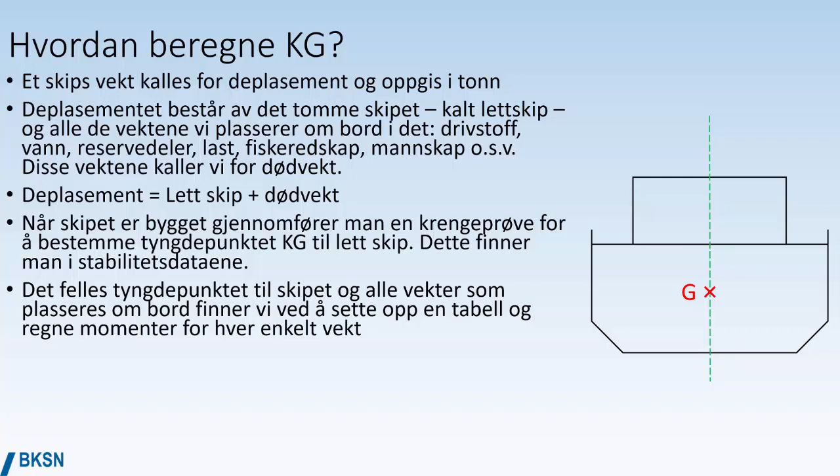The center of gravity of the ship and all the weights placed on board we can find by putting up a table and calculating the moment, or torque, for every single weight. So we put a lot of different weights on board the vessel and can easily calculate the center of gravity for the ship with all these weights.

Moment equals weight multiplied by arm, where the arm is the kg for the specific weight, and we will see how this is done. Then the new kg is sum of moments divided by sum of weights.

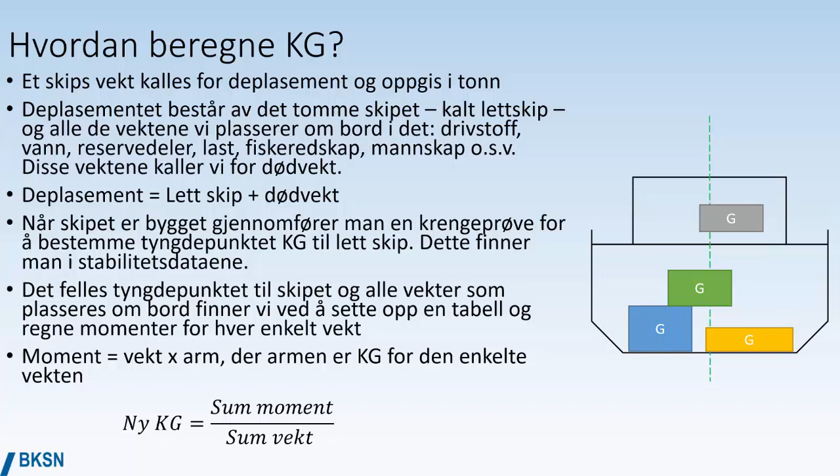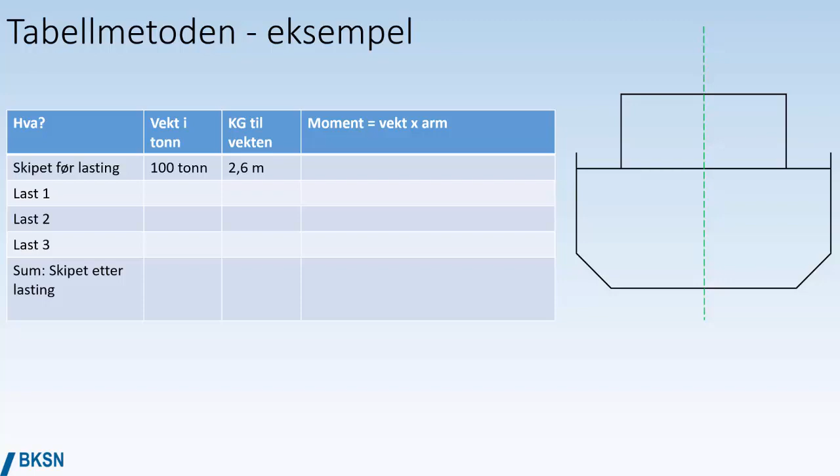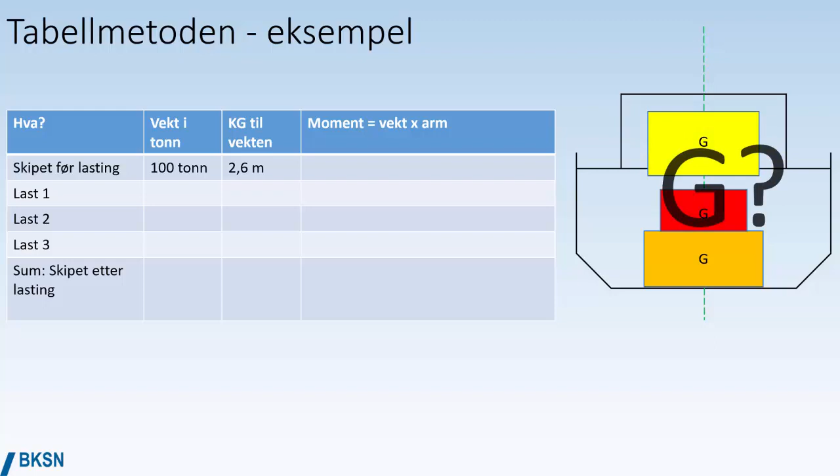An example: the ship before loading had a displacement of 100 tons with a kg of the vessel of 2.6 meters, and then we put on board 3 different weights. What is the G afterwards?

Before loading we had a moment of 260 ton meters. We take on board cargo number 1, 30 tons by 1.2 meters, which gives us 36 ton meters. Cargo number 2, 22 tons at a kg of 2.5 meters, gives us a moment of 55 ton meters. Cargo number 3, 5 tons at a kg of 5 meters, gives us another 25 ton meters.

Then we sum the weights and sum the moments, and the new vertical center of gravity is sum of moments divided by sum of weights. So 376 ton meters divided by 157 tons gives us a kg of 2.39 meters. Before loading the kg was 2.6 meters; after loading it's gone down to 2.39 meters.

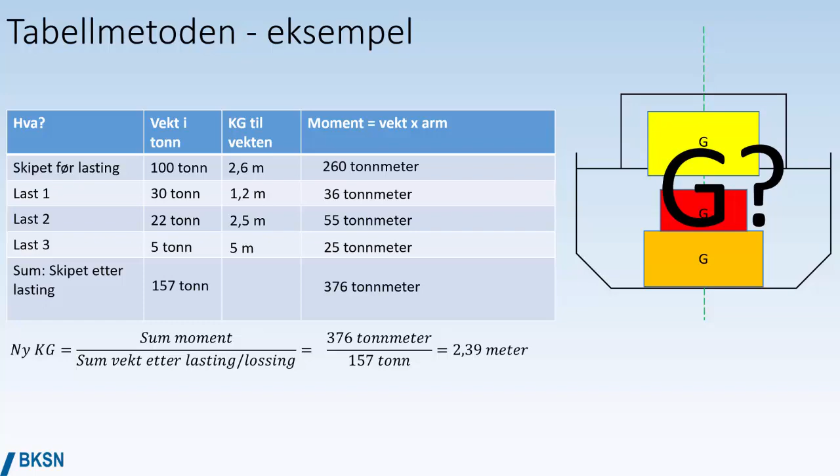A working task: we have a vessel Kystfart with a displacement before loading of 210 tons and a kg of 2.2 meters. Then they take on board a deck cargo of 24 tons with a kg of 3 meters. What is the kg for Kystfart after loading?

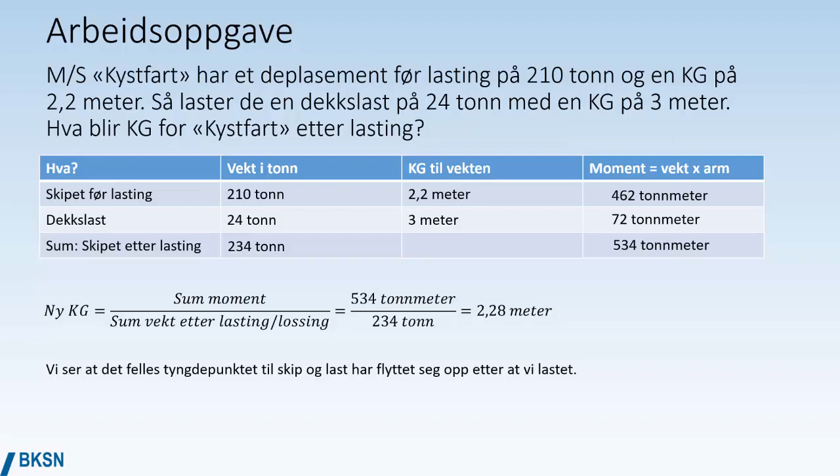210 tons multiplied by 2.2 meters gives us 462 ton meters. The new deck cargo, 24 tons at kg 3 meters, gives us a moment of 72 ton meters. Sum moment, 534 ton meters. Sum weight, 234 tons, which gives us a new kg of 2.28 meters. So we see the center of gravity of ship and cargo has moved upwards when we loaded the deck cargo.

For discharging it's pretty much the same, except that we have to use a minus. A ship has a displacement of 550 tons before discharging and a center of gravity of 3.06 meters.

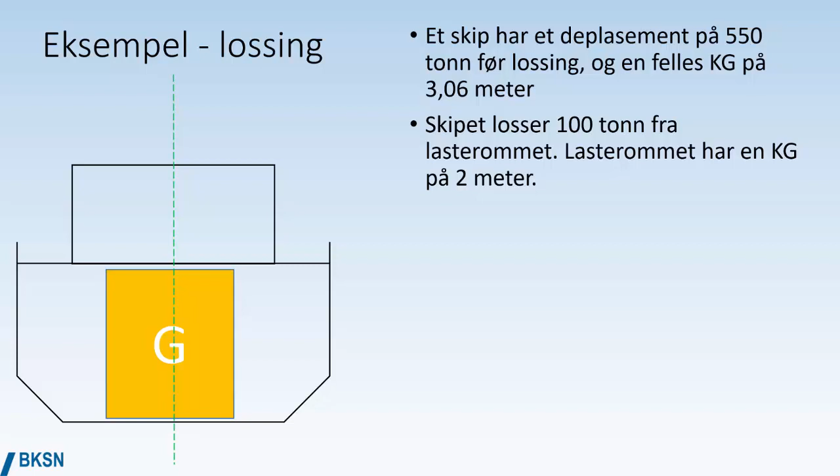Then we discharge 100 tons from the cargo hold. The cargo hold has a kg of 2 meters. So we discharge that, and then what will the kg for the entire vessel be after discharging? When we discharge weights we use a minus for the weight in the table, as we will see.

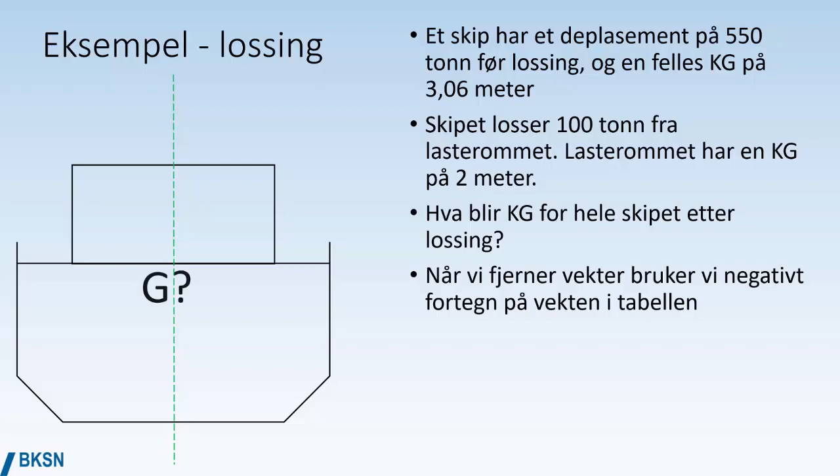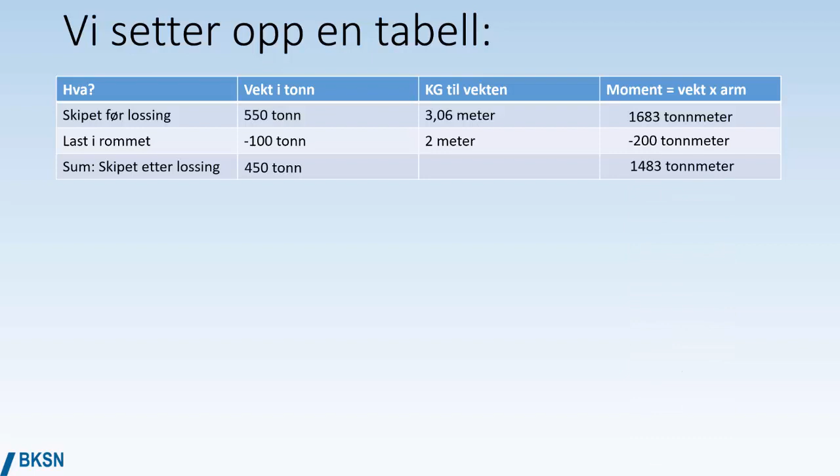Put in the table, we see the discharged weight last i rommet, minus 100 tons. The calculation gives us a moment of minus 200 ton meters. This gives us a displacement after discharging of 450 tons, a moment after discharging of 1,483 ton meters, and the new kg is then 3.3 meters.

So we can see that the center of gravity of ship and cargo has shifted upwards after discharging, which is logical since the discharged weight was fairly low down in the hull.

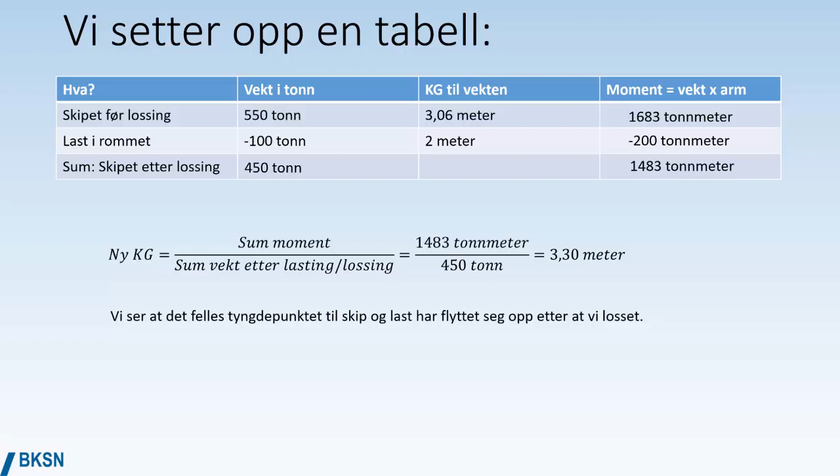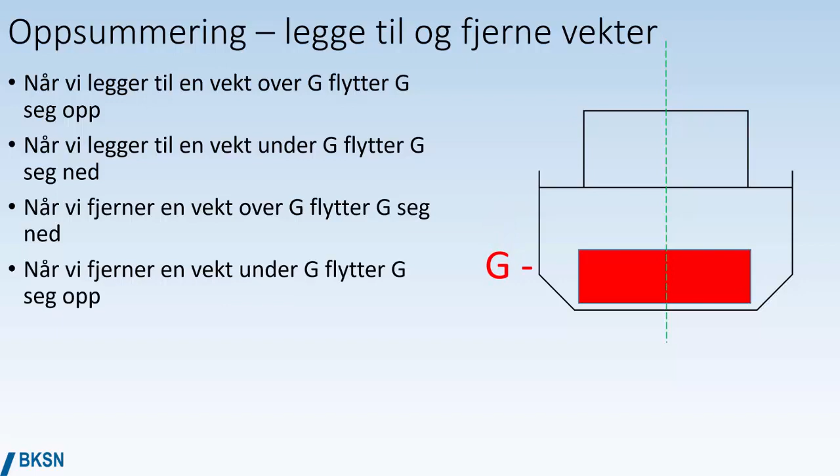Summarizing, adding and removing weights: when we add a weight above G, G shifts upwards. When we add a weight beneath the center of gravity, the center of gravity will shift downwards. When we remove a weight above G, G will shift downwards. And when we remove a weight underneath G, G will shift upwards again. This is, of course, very logical.

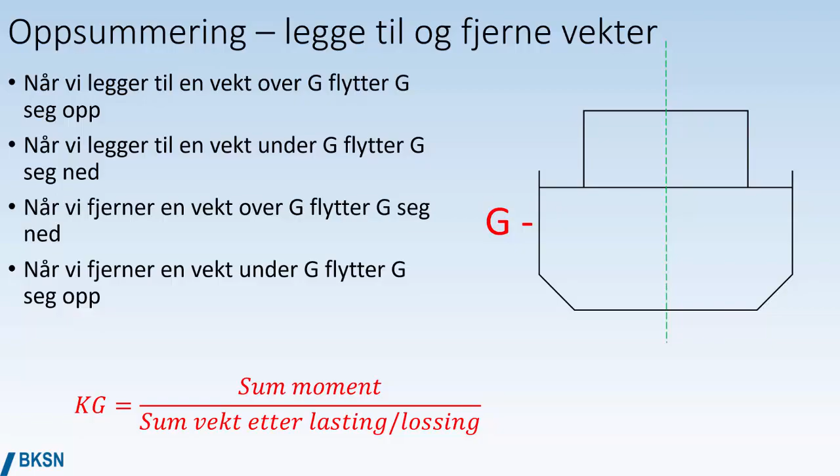Kg, the center of gravity for the vessel, is sum of the moments divided by sum of weights after loading or discharging. So far, we have made a table, added or removed weights, calculated moments, and then summarized to find the kg.

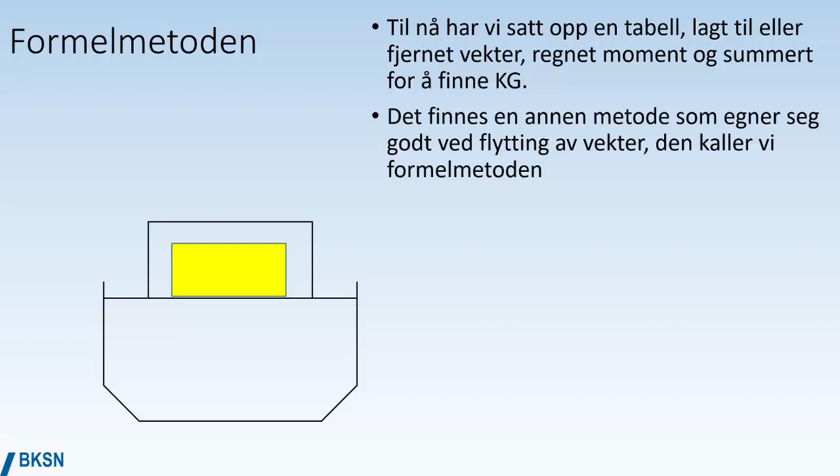There is another method which is suitable when you are moving weights on board a vessel. We call this the formula method. The formula looks like this: GG1 equals weight multiplied by arm divided by displacement. GG1 means how much G of the entire vessel moves as a result of moving one individual weight.

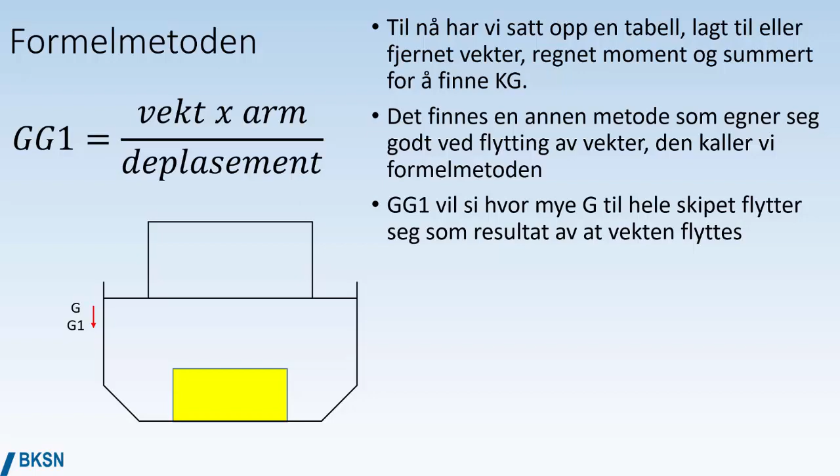So we move the yellow box from the deck level down into the hold, and GG1 is how much the G of the entire vessel shifts. We will look at an example.

We will calculate how big the effect on KG is if you move a 3-ton fishing net from the deck down into the cargo hold. We're assuming that the GM is 0.48 meters, the displacement is 750 tons, and the vertical distance between deck and the cargo hold is 5 meters.

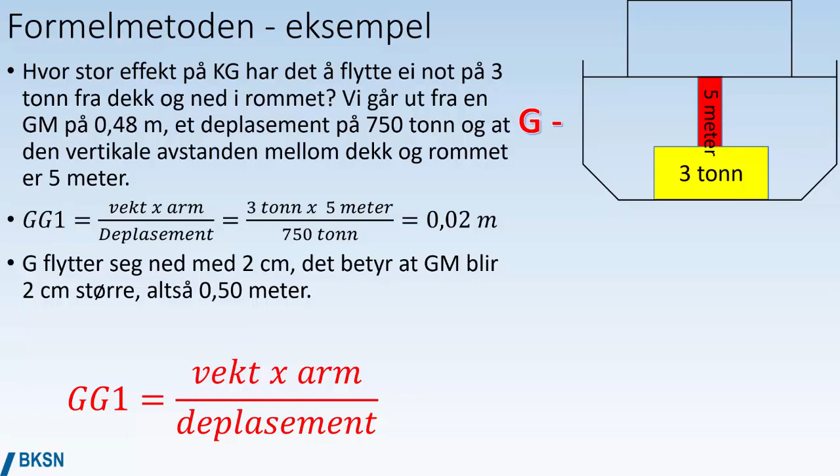So we're shifting 3 tons downwards 5 meters. How much does the G move? We put into the formula 3 tons by 5 meters divided by 750 tons, giving us a GG1 of 0.02 meters. So G moves down by 2 centimeters, which means the GM will be 2 centimeters bigger, going from 0.48 meters to 0.5 meters.

Another example: we have a GM of 0.39 and we want to move an old compressor from a lower deck onto the upper deck to put it ashore. The weight of the compressor and its equipment is about 2 tons and the vertical distance is 4 meters. The displacement of the vessel is 245 tons.

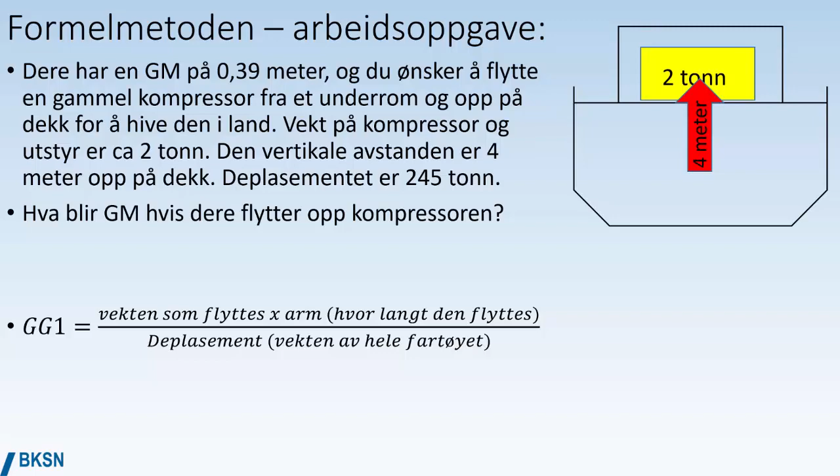What is the GM if we move the compressor up? How much does this move affect the G of the entire vessel? We put the numbers into the formula: 2 tons by 4 meters divided by 245 tons, which gives us 0.032 meters. The GM was 0.39.

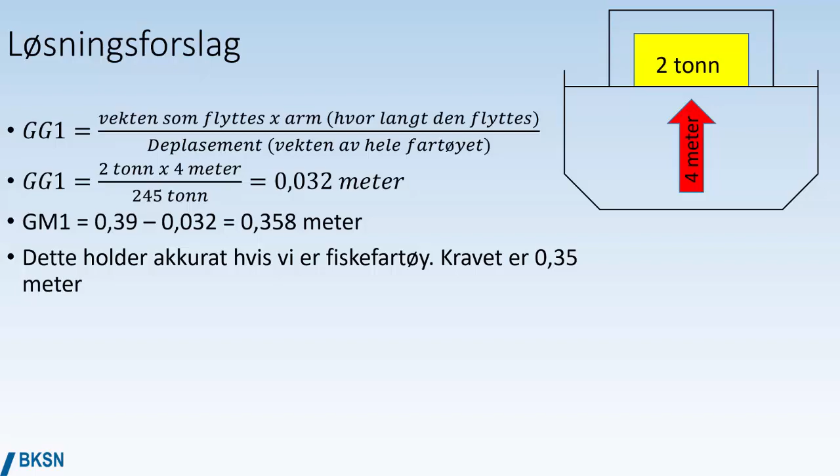We're moving a weight upwards in the vessel, which reduces the GM, so we end up with a GM of 0.358 meters. This is just within the requirements if we're a fishing vessel, where the minimum requirement for the GM is 0.35 meters.